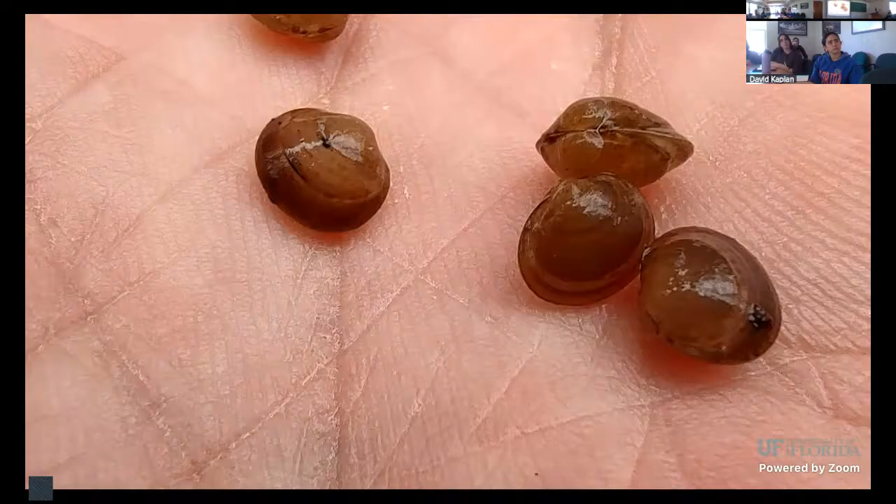The wetland basins at Fort Ancient contain clay that was purposely compacted. Some of the vernal ponds are lined with gravel. The gravel was carried by hand in baskets uphill from the Little Miami River. The vernal ponds are being used for breeding by fingernail clams, frogs, toads, salamanders, and dragonflies.

The wetlands are based on compacted clay, so water is slow to soak into the ground. Tree roots growing under the vernal ponds cannot remove water from the ponds because of the compacted clay layer. The overflow or spillway for the wetlands at Fort Ancient Earthworks are wide. This allows water to leave the wetlands in a sheet-like pattern and not cause erosion.

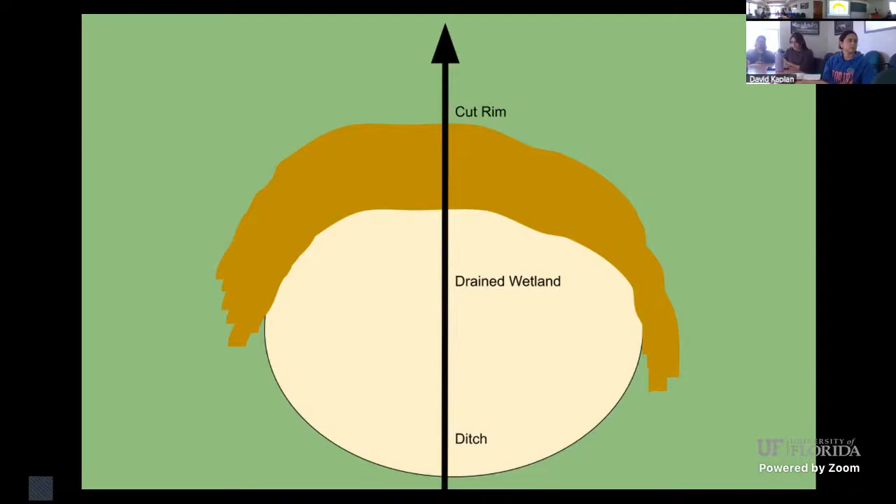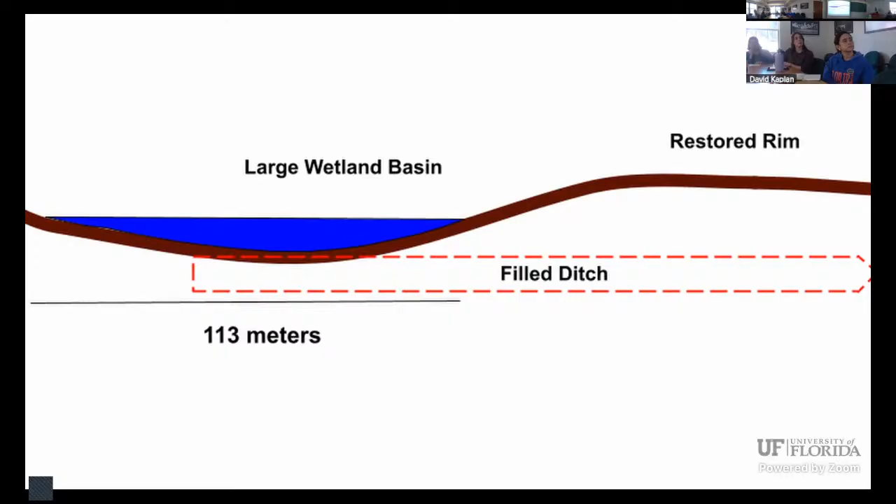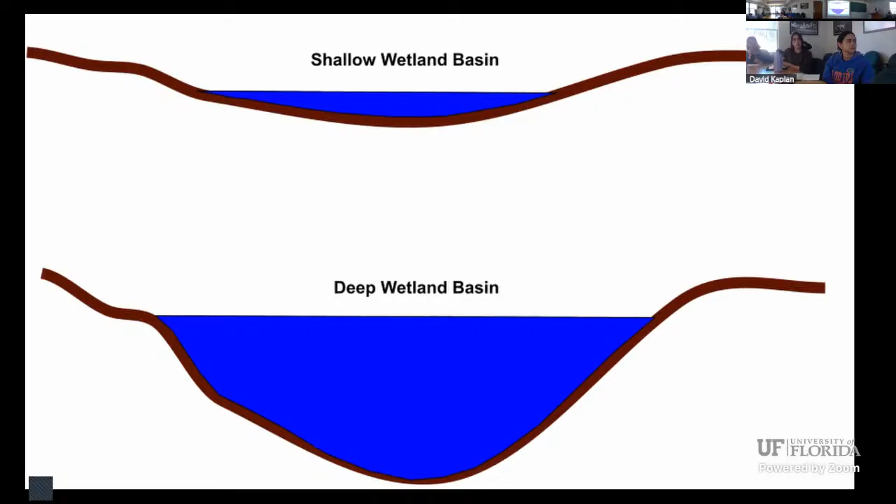The wetland basins you build can be large or small. You can build a wetland basin to be shallow like this one, or deep like this one. The wetland basin can be shaped to be smooth or varied with pits and mounds so shrubs and trees may grow in the wetland.

Start the design process by identifying an area where there is no stream, no ditch, or drainage that would enter the wetland. This is a good place to build a wetland that will last forever because the area does not flood and there are no streams or ditches entering or leaving the area. Walk around the area to identify and map ditches.

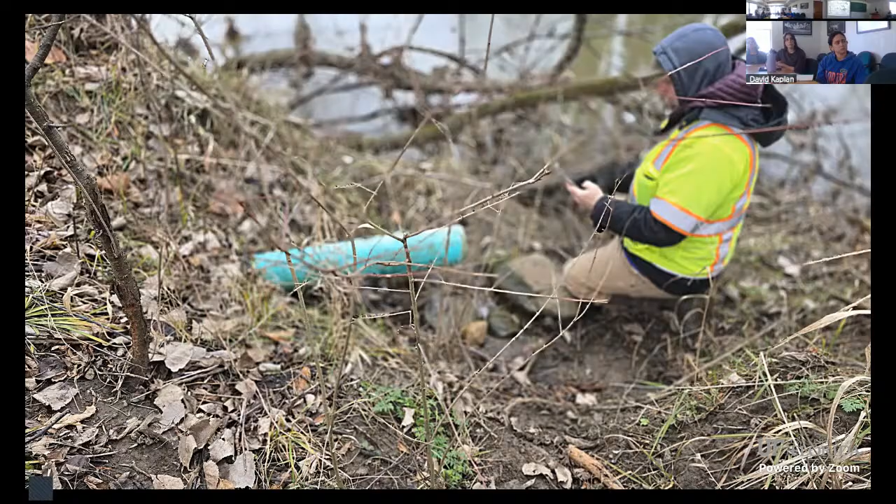Examine ditch banks carefully to see if you can find the outlets of buried drainage structures. Look for pieces of pipe that indicate drainage structures were buried on the site. Look carefully for vertical holes that often indicate the presence of buried drainage structures.

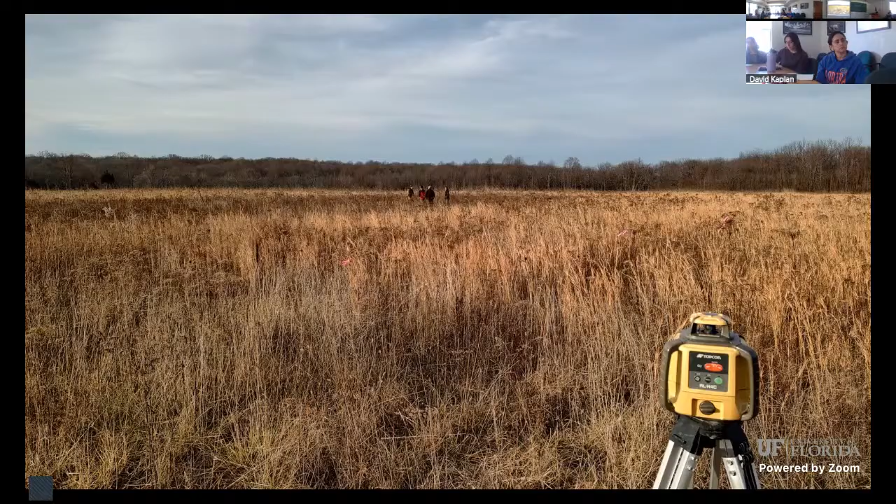Set up a long-range laser level with a red beam on a tripod next to the area where you want to build the wetland. Use a laser receiver and a dual-sided grade rod to measure the change in elevation from the upper to the lower edge of the wetland you would like to build. Record the elevations you take with a dual-sided grade rod on a GPS and on a wetland design form.

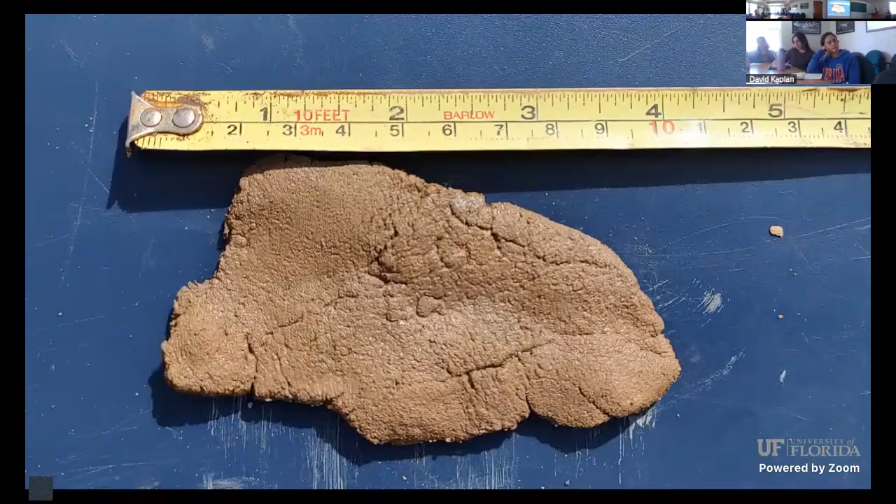Use an open-face clay auger to dig a deep test hole near the center of the wetland you would like to build. Wait and see if groundwater enters the hole. You may be able to use the groundwater technique to build the wetland if water seeps into the hole and rises near the surface. Use the ribbon test to measure clay content in the soil. You may be able to build the wetland using the surface water technique if you can form a long and thin ribbon that does not break that is at least 2 inches or 5 centimeters long.

This open-face clay auger contains soil that is very low in clay. One would need to use an aquatic-safe liner to build a wetland on this site. This is because the short sections of ribbon show that the soil is low in clay. Also, groundwater did not enter the test hole. An aquatic-safe liner is needed to build a wetland on this site because groundwater did not enter the test hole and the soil texture is low in clay.

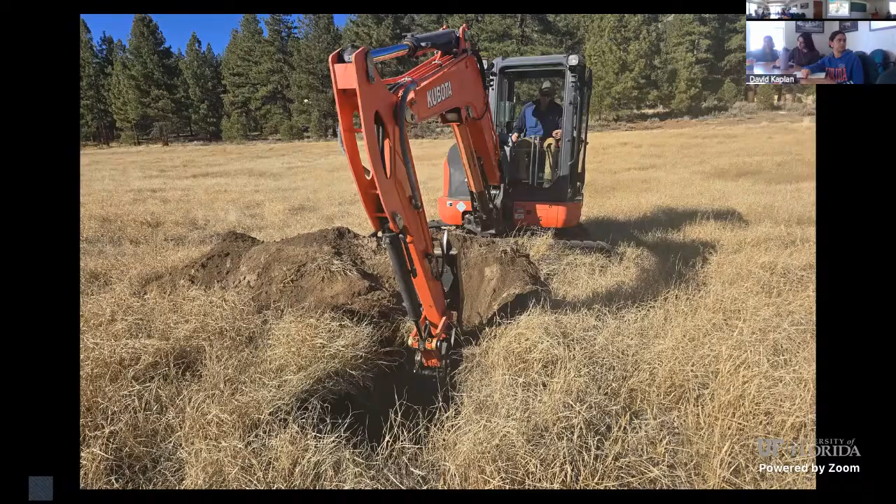I strongly recommend using an excavator to dig deep test holes when designing a wetland project. One can better see and measure the depth and the thickness of soil layers that are exposed in the deep test holes dug with an excavator. This deep test hole shows that groundwater is near the surface and a wetland may be built using the groundwater technique. The reason groundwater is not at the surface is that ditches and buried drainage structures were installed to drain the historic wetland so it could be farmed.

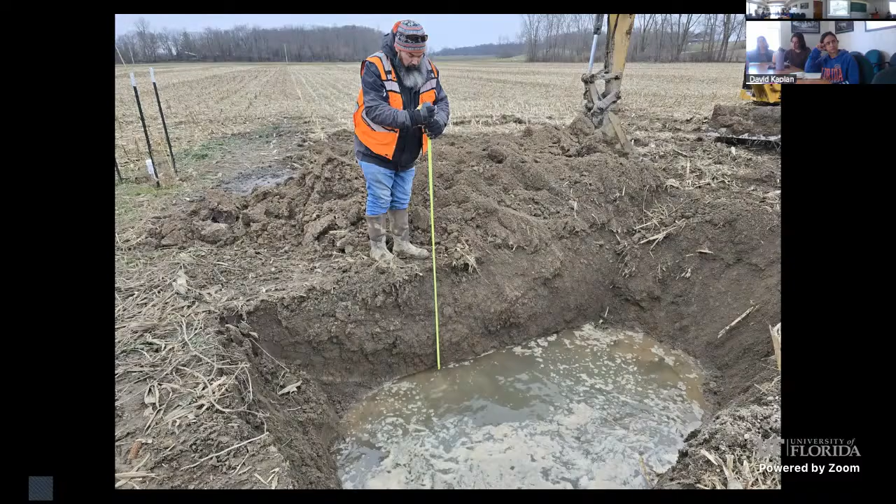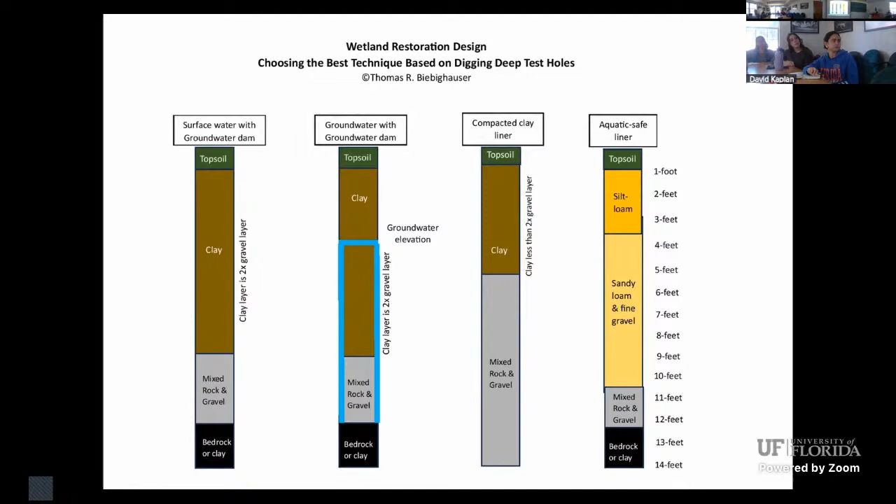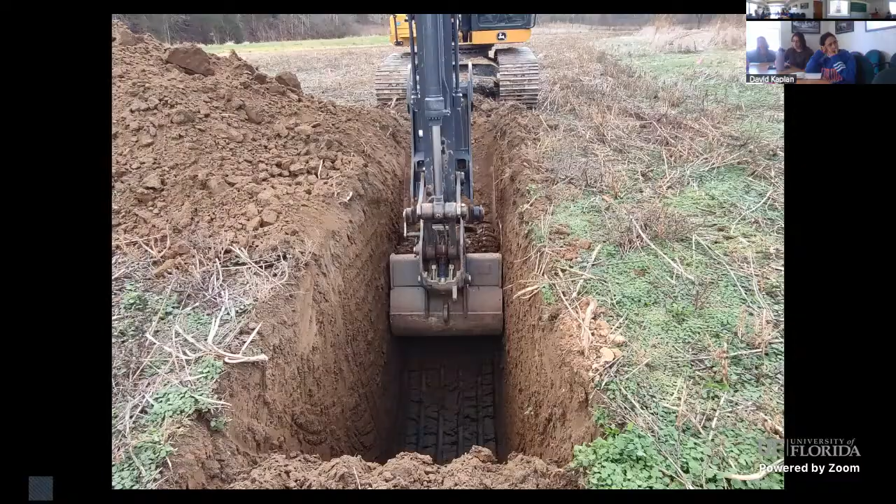This table can help you choose the best technique for building a wetland on a site. Each technique is based on soil texture by layer and the elevation of groundwater that's found in the test holes you dig. This key can help you choose the best technique to use for building a wetland on a site. Here's a wetland that was built using the surface water technique with a groundwater dam. The surface water technique with a groundwater dam is used where there is a thick layer of clay over a thinner layer of gravel that overlays impermeable bedrock or a very thick layer of clay.

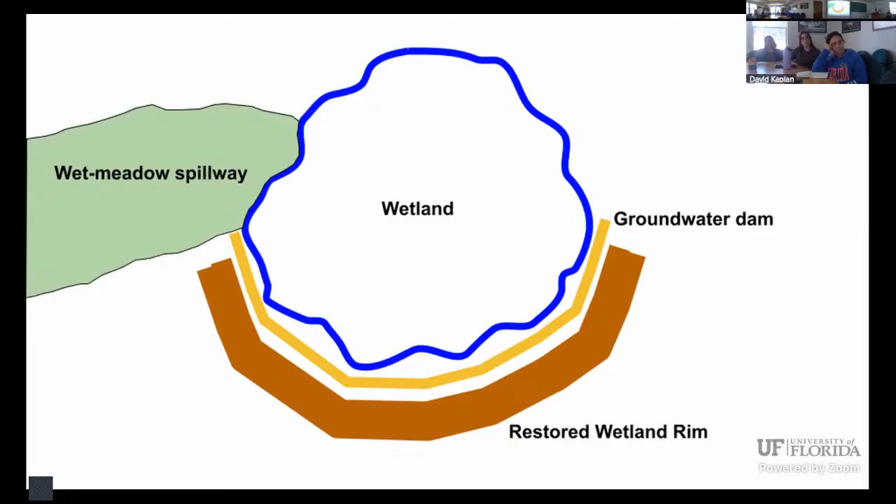When building a wetland using the surface water technique with the groundwater dam, it is of critical importance that buried drainage structures are removed and subsurface permeable layers of soil are interrupted by digging a core trench around the lower 2/3 perimeter of the wetland you're building, and then filling this core trench with clay in thin layers that are compacted to form a groundwater dam. I developed the surface water technique with a groundwater dam because it is the most effective and the lowest cost way to build a wetland of any size.

Groundwater dams are effective because they block buried drainage structures that are made from wood, rock, clay tile, or plastic. They reduce water losses from roots, root channels, and topsoil. They block water leaving the wetland underground in permeable layers of organics, gravel, sand, silt loam, and loose clay. And they allow burrowing crayfish to live in your wetland without draining the wetland.

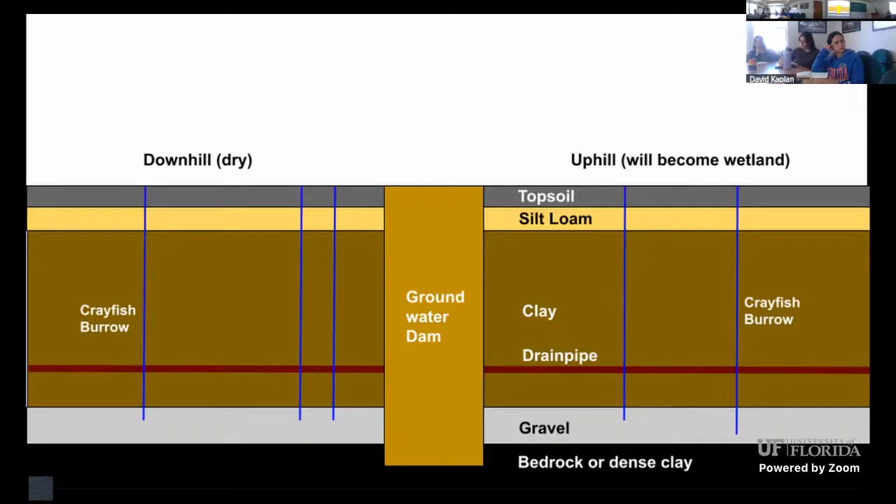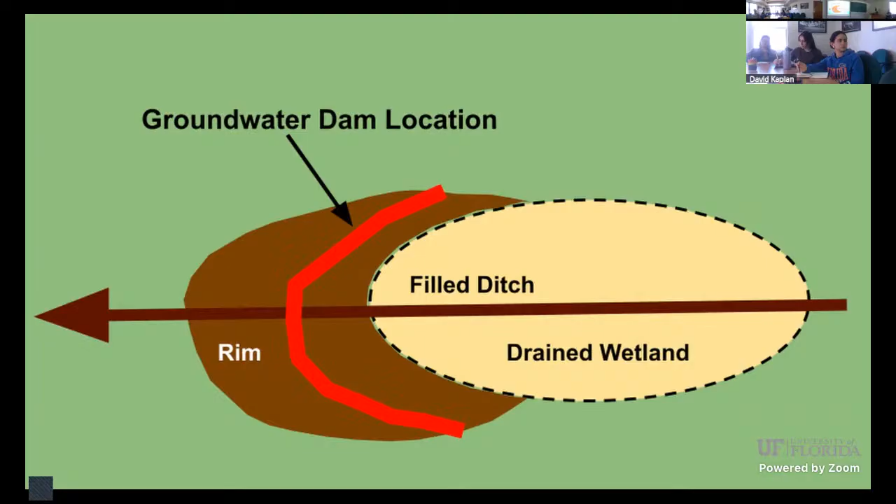A groundwater dam is built along the lower 2/3 perimeter of the wetland you've designed. The top of the groundwater dam should be equal to or higher than the elevation of water or saturated soil in the wetland that you're building. To restore a wetland, it is necessary to fill the ditches and to restore the natural rim along the lower side of the wetland that was drained.

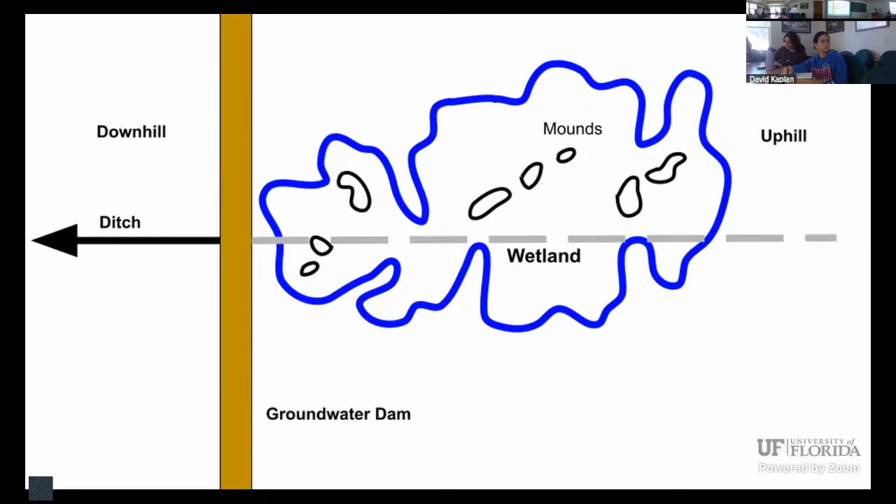The groundwater dam will block the flow of water in buried drainage structures and in the ditches that have been filled. A groundwater dam should be used wherever you are blocking a ditch to build a wetland. The groundwater dam will block the water you see flowing in the ditch and the water you can't see that's flowing underground in the ditch.

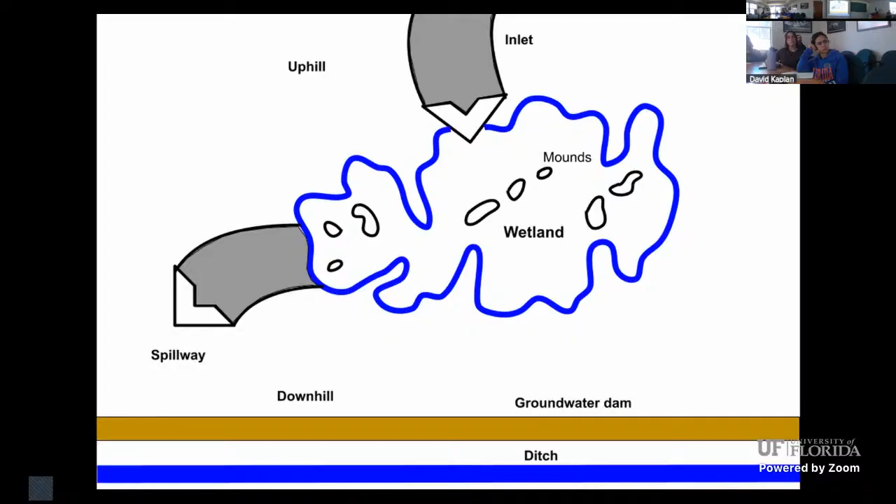Here's where a groundwater dam should be built when you are building a wetland that is near a ditch that cannot be blocked by the project. The groundwater dam will prevent the ditch and the water flowing in underground drainage structures from drying the wetland that you're building.

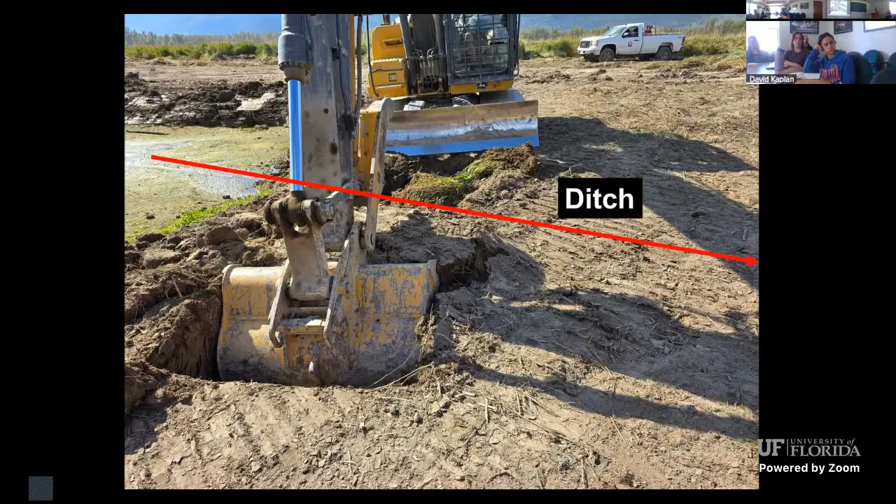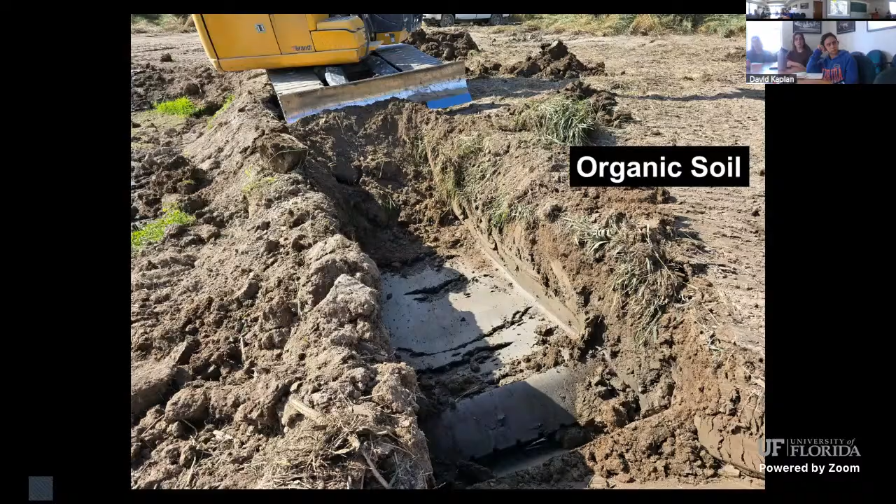Here's how we use an excavator to build a groundwater dam to block a ditch as part of a wetland restoration project. The excavator begins by digging a trench across and perpendicular to the ditch. The ditch is shown by the red arrow. The soil that is organic or low in clay is placed along the downhill or downstream side of the trench being dug. This soil will not be placed back in the trench. The soil that is high in clay is placed along the uphill side of the trench. This clay will be placed back in the trench to form the groundwater dam.

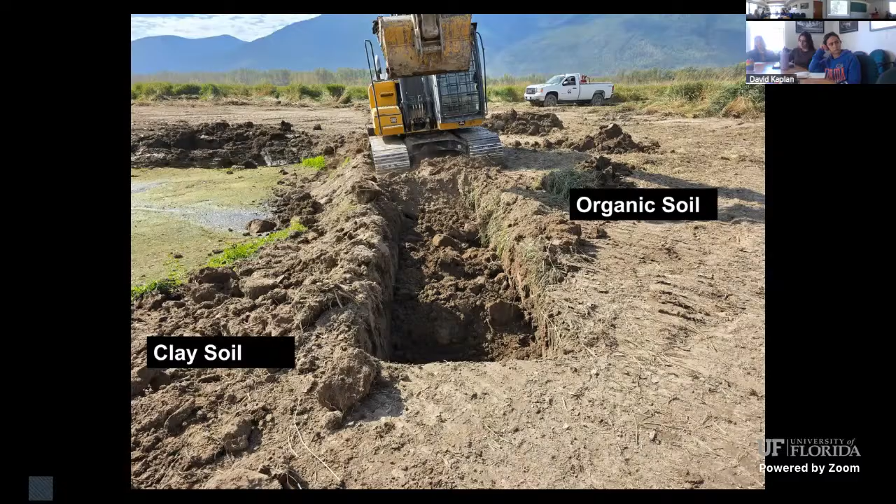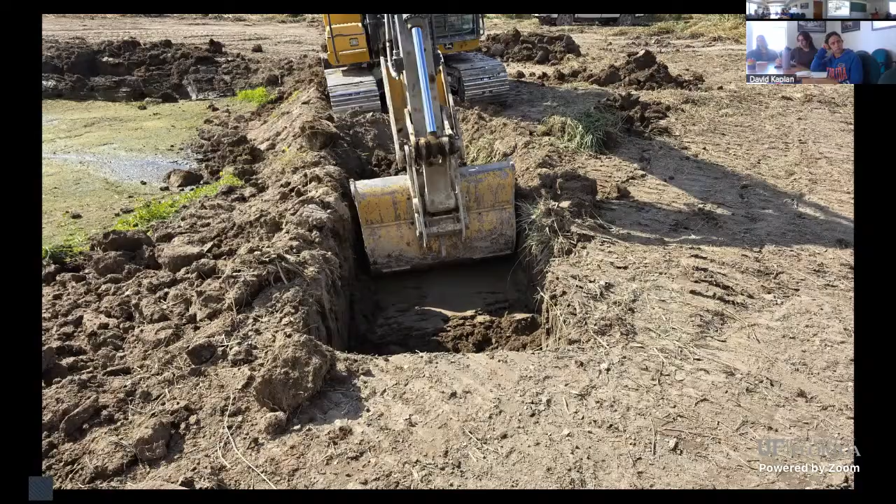The excavator operator digs down into a very thick layer of clay that is gray in color. The clay soil that was saved is mixed and placed back into the section of trench that was dug. The operator compacts the clay soil in layers using the bucket on the excavator. To gain maximum compaction, the operator tips the excavator forward so the entire weight of the machine is on the bucket. The core trench is dug and filled in sections to build the groundwater dam.

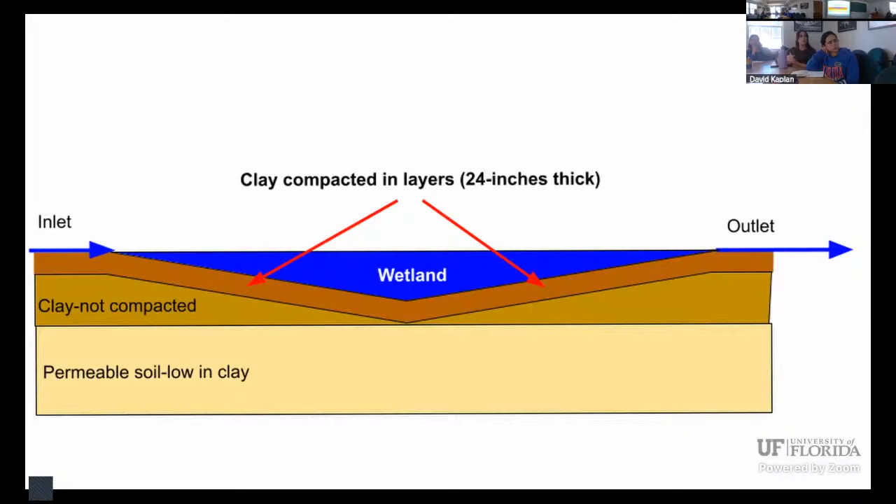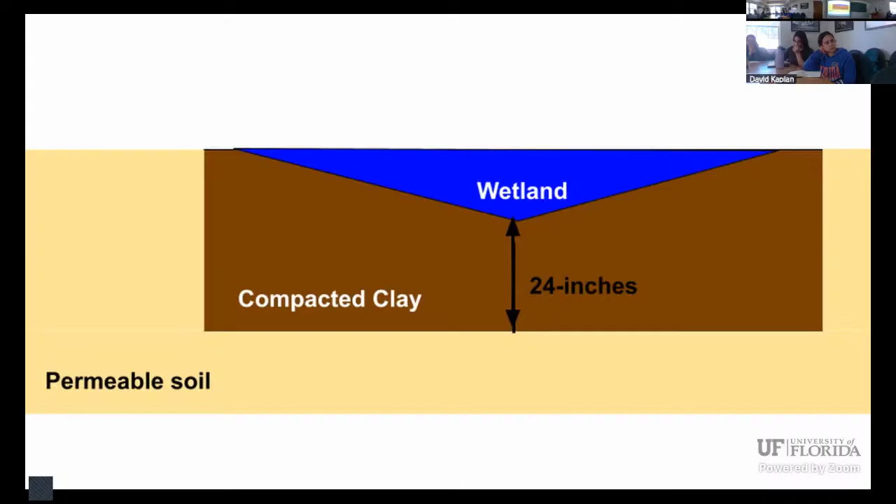We built this wetland at Sweet Briar College in Virginia using the compacted clay liner technique. The compacted clay liner technique is used where it's not possible to build a groundwater dam and there's a layer of clay near the surface that is at least 4 feet thick. The compacted clay liner technique is difficult and costly to use. This is because it is necessary to spread and compact in layers clay so that it is at least 24 inches thick in the basin to form a wetland.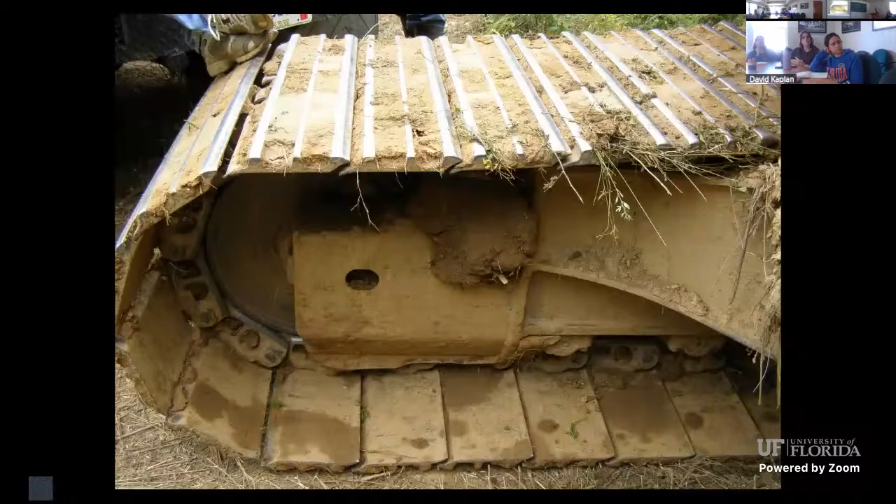We set up the laser level on a mound so the beam would be above the tall vegetation in the field. We first used the laser to measure how much sand to remove and then to monitor the thickness of compacted clay we used to line each basin. Here the excavator is being used to spread a 6-inch thick layer of clay over the sand in the basin for the wetland. The excavator then travels over the layer of clay to compact it.

The next step involves traveling over the layer of clay with a tractor that has rubber tires. To obtain greater compaction, the tractor operator carries a full bucket of soil as it drives over the clay. The tractor operator travels around the wetland basin in different directions to compact the clay.

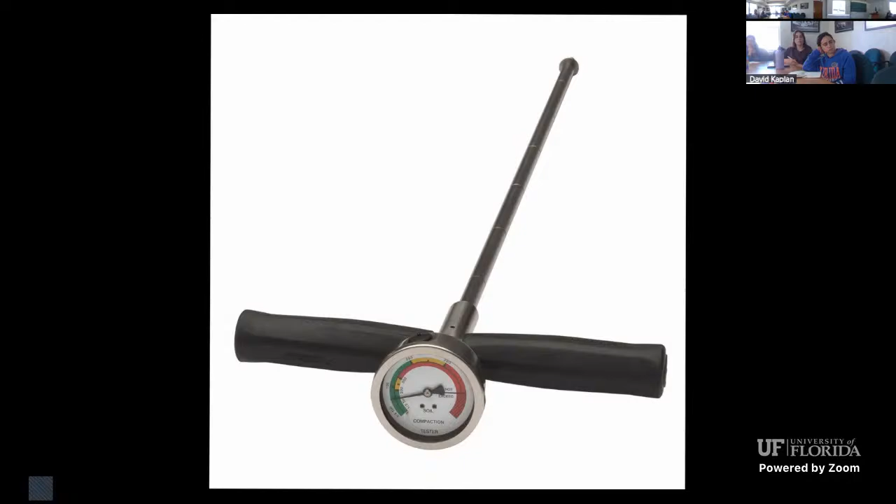The excavator spreads the second layer of clay over the first layer of compacted clay. The tractor travels over each layer of clay multiple times until it's compacted. We frequently measure the degree of compaction with a penetrometer and the thickness of compacted clay using a laser level. We keep adding and compacting layers of clay until there is at least 24 inches of compacted clay over the

entire wetland basin. The topsoil that was saved is now spread over and around the compacted clay in the wetland basin. The excavator is used to plant clumps of vegetation that were saved when the area was cleared. Wheat and native plants are seeded in and around the finished wetlands.

Here's how one of the wetlands we built at St. Anne's Convent using the compacted clay liner technique appeared 3 years after construction. Here's one of the wetlands we restored using the compacted clay liner technique near the community of Sparwood in British Columbia. This small vernal pond was inadvertently created using the compacted clay liner technique when iron ore was mined in Bath County, Kentucky almost 100 years ago.

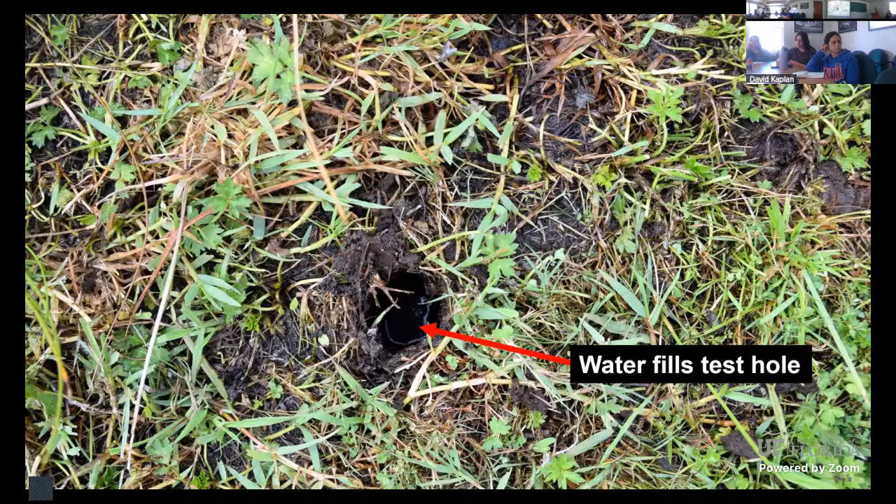We built this wetland using the groundwater technique near Meadow Creek in British Columbia, Canada. If groundwater fills the test hole you dig, then you may be able to build a wetland on the site using the groundwater technique. Here's how a vernal pond wetland we built looks in the spring on a site where groundwater is near the surface in the spring. And here's how the same vernal pond looks when the groundwater drops to more than 6 feet below the surface

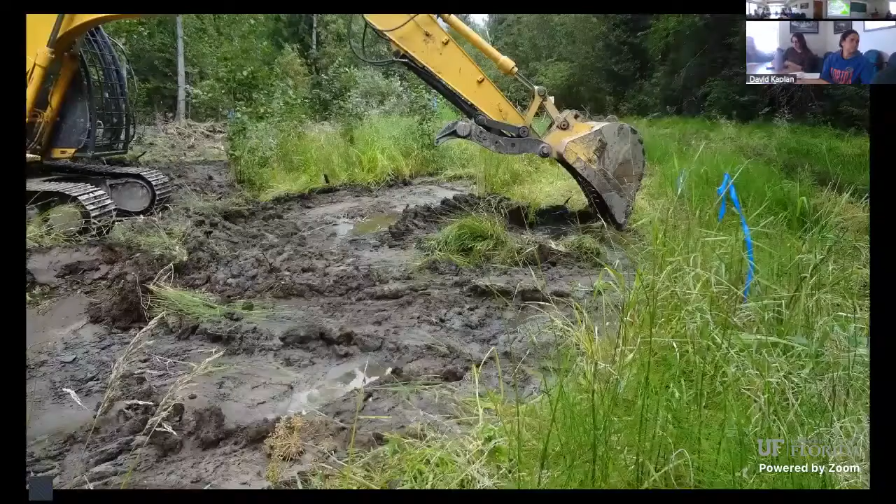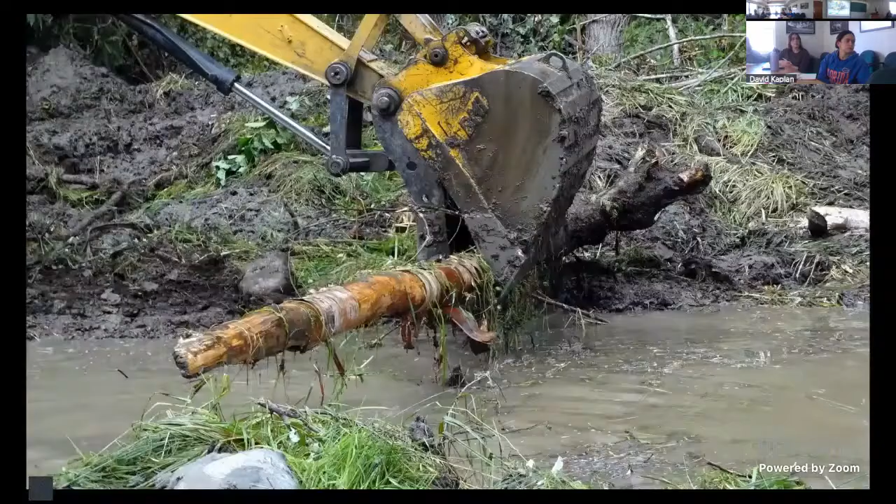in the fall. Here an excavator is being used to build a wetland using the groundwater technique. Groundwater is rapidly filling the depressions being made by the machine. The excavator operator keeps the machine from sinking by placing logs under the tracks. Logs are placed in the wetland to provide perches for birds and turtles with basking sites.

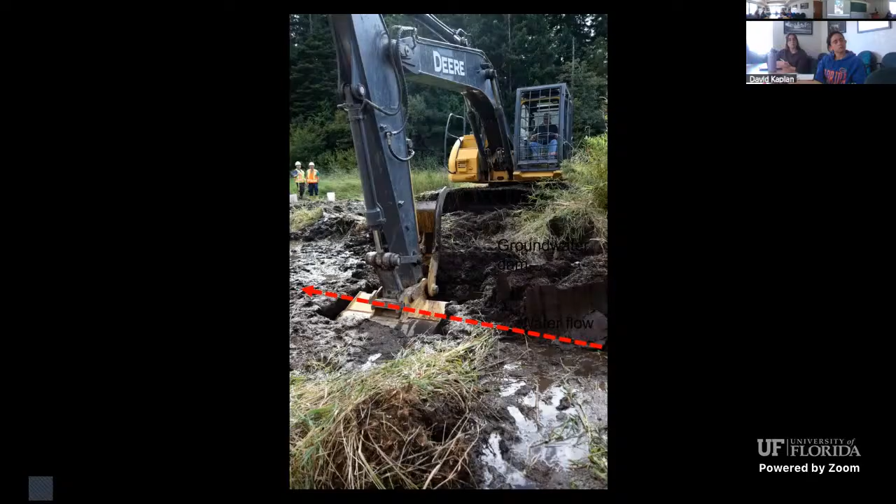The disadvantage in using the groundwater technique is that there's a lot of soil that needs to be spread. Think of how much space it would take if you flipped a pie out of a pie pan. The same is true when digging a wetland using the groundwater technique. Here's one of the wetlands we built using the groundwater technique the day it was finished. The site looks unattractive with all the exposed mud.

This photo shows another wetland we built using the groundwater technique. The new wetland doesn't look good because the water is muddy. The photo was taken the same day the wetland was built. The new wetland looks great 1 year after construction. The logs are being used by the western painted turtle for basking. The soil we removed and spread has become wet meadow wetland.

While building the wetlands, I could hear water running near the wooden bridge that people were standing on. The sound was made by water flowing over the head cut under the bridge. We had to control the head cut before it could advance and destroy the wetlands we were building. The excavator began by digging a deep trench across the floodplain of the ditch immediately upstream and adjacent to the head cut. We dug the trench deeper than the bottom of the ditch downstream of the head cut.

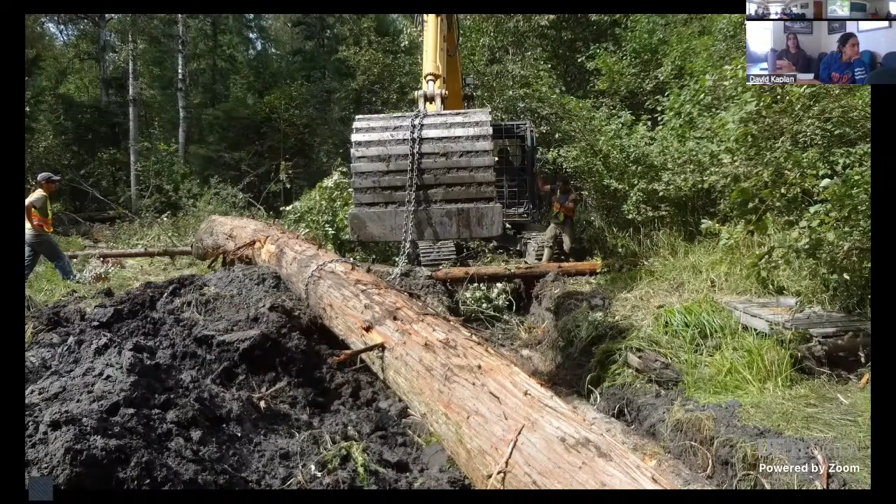We used a tape to measure the length of the trench that spanned the floodplain of the ditch so we could find and cut trees that would fill the trench. We used the excavator to place the largest diameter trees we could find in the trench. We worked to fit the trees tightly together in the trench. The excavator operator used the bucket on the machine to push the logs into the ground and to pack them

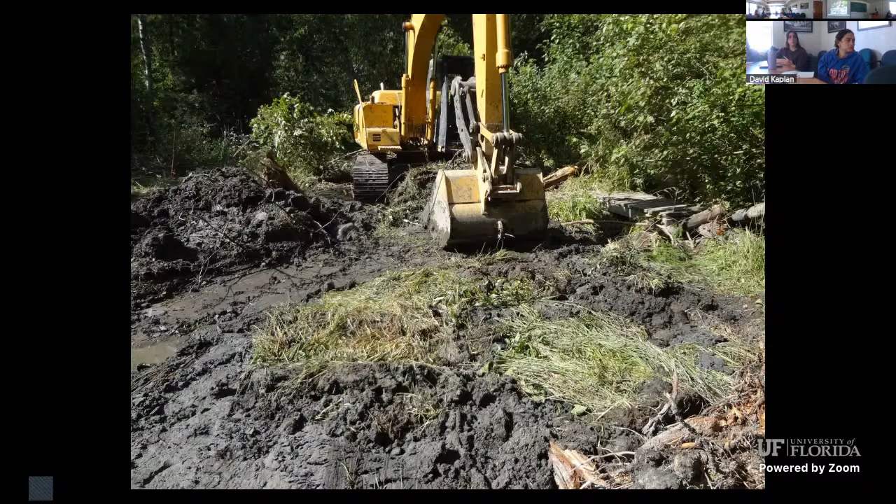tightly together. Soil was pushed into the gaps between the logs and to cover the logs, forming a wide floodplain with low banks and a narrow channel in the middle for water to flow over the logs into the deeper channel downstream of where the head cut was located. The floodplain was shaped so that water would flow over the logs in a sheet-like pattern and not cause erosion. Clumps of sedges were embedded into the soil over the logs to control erosion.

I've been using aquatic safe liners to build wetlands like this one, and this is where clay soils are not present and groundwater is not near the surface. We've been building wetlands for rare species of amphibians and reptiles across North America using aquatic safe liners.

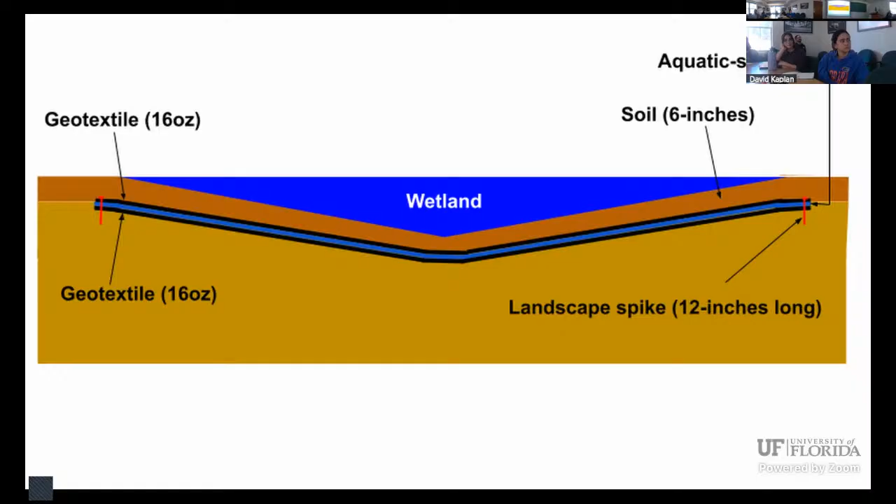This drawing shows a profile view of how a wetland may be built using a one-piece factory-seamed aquatic safe liner that is protected on both sides by thick layers of geotextile and covered with at least 6 inches of soil. The most efficient way to build a wetland using an aquatic safe liner is to use an excavator.

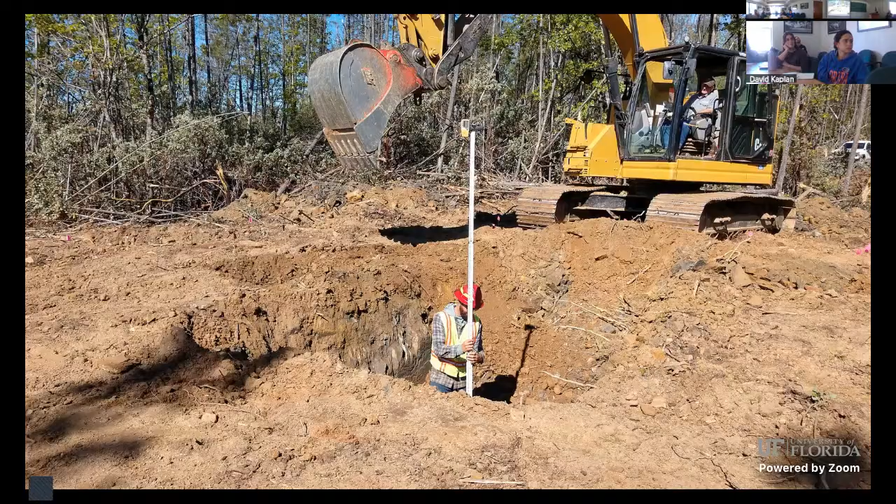Here the excavator removes trees and shrubs from a location where a wetland is being built. You can see a piece of rebar that we used as a stake to mark the center of the planned wetland. The excavator digs a deep hole in the center of the area where the wetland is being built. The elevation in the bottom of the hole is equal to the final depth of the planned wetland, plus the thickness of soil to be placed over the liner and geotextile.

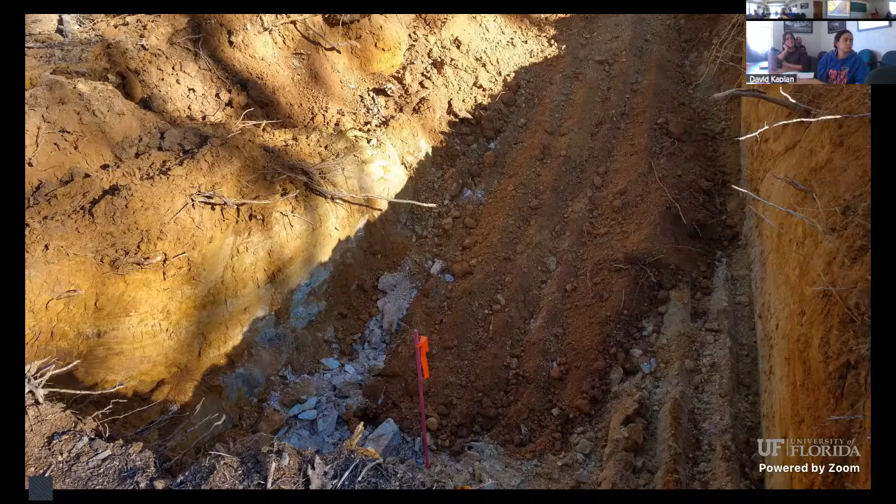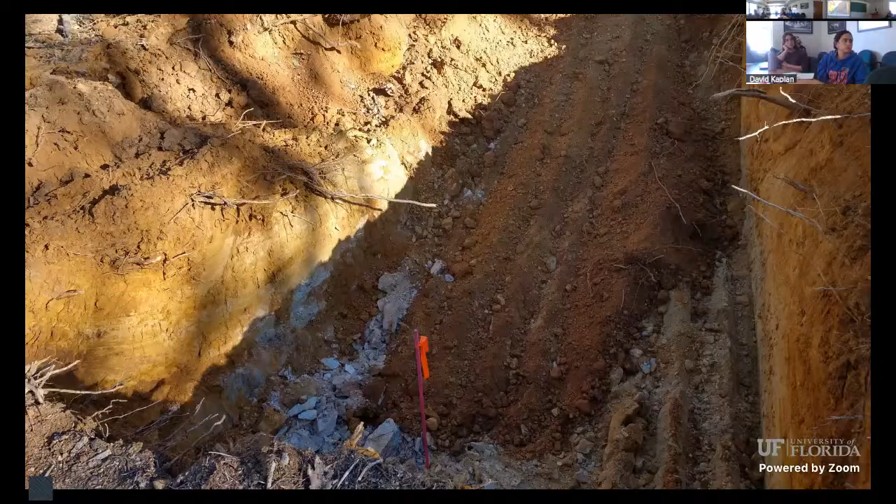The stake serves as a guide when digging the basin for the wetland. The wetland basin is dug deepest in the center with slopes no steeper than 20%. The gradual inside slope prevents soil that is placed over the liner from slipping downhill if deer or elk wade into the water. Digging the wetland basin is much like removing pieces of pie from a pie pan.

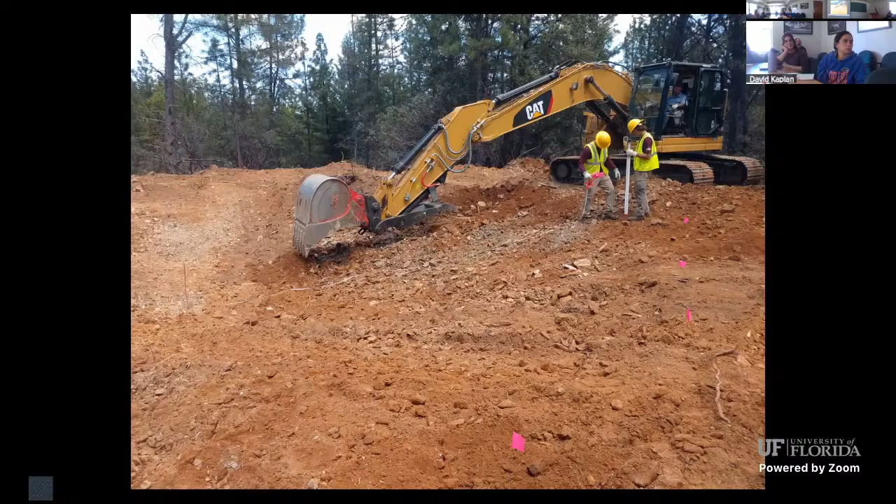It is of critical importance to be on site working with the heavy equipment operator to build a wetland using a liner. Here the end of the tape has been placed over the rebar stake. The tape is stretched out to a distance equal to the radius of the liner being used.

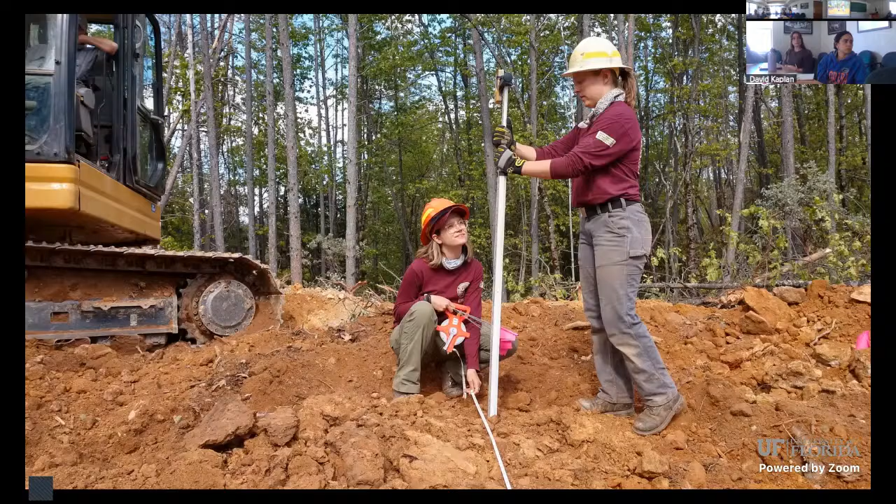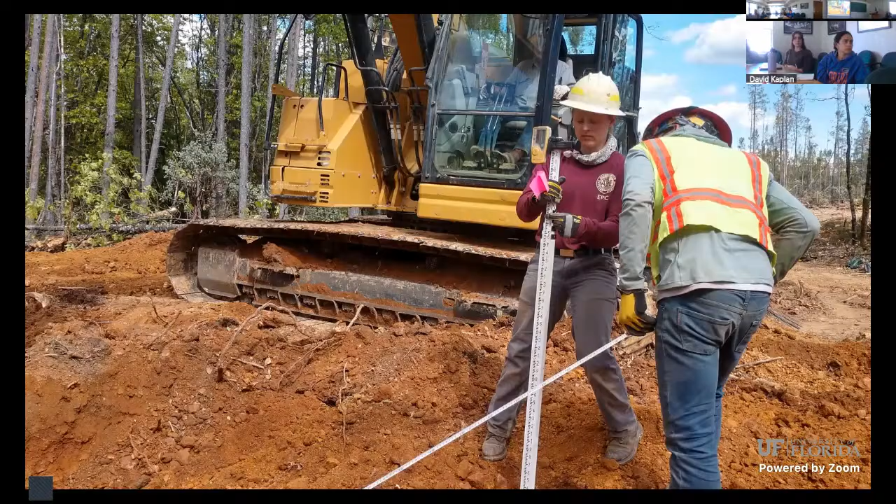A laser level is used to check the elevation of the ground at a distance equal to the radius of the liner being used. All the elevations around the perimeter of the basin must be the same. Any low spots would reduce the depth of water in the finished wetland. Elevations are checked before the excavator moves to dig another section of the basin.

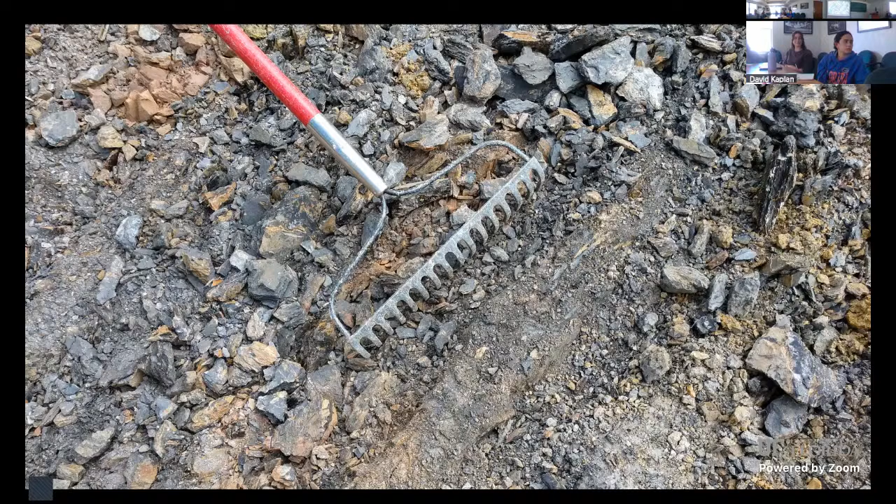Once the basin is dug, all rocks are removed by hand before the liner and geotextile are placed. Removing the rocks from the basin takes time, but helps to ensure that the wetland will hold water as planned. A pickup truck is used to transport the liners and geotextile from where they are stored to the worksite.

A thick layer of fabric called geotextile is placed in the basin to protect the underside of the liner being installed. A fish-grade, aquatic-safe liner is placed over the geotextile. Another layer of geotextile is placed over the liner to protect the surface of the liner. 12-inch long landscape spikes are used to anchor the top edge of the liner and geotextile. These are placed 1.5 feet apart.

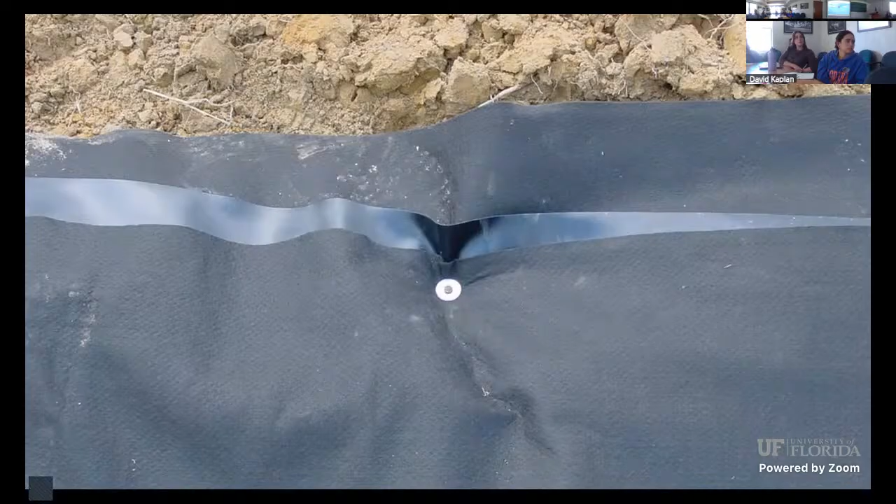The 12-inch long spikes are used to anchor all 3 layers, preventing the materials from slipping when being covered with soil. The corners of the material are cut and removed before covering with soil. Wire flags are placed along the perimeter of the geotextile and the liner to show the excavator operator where the liner is located while covering with soil.

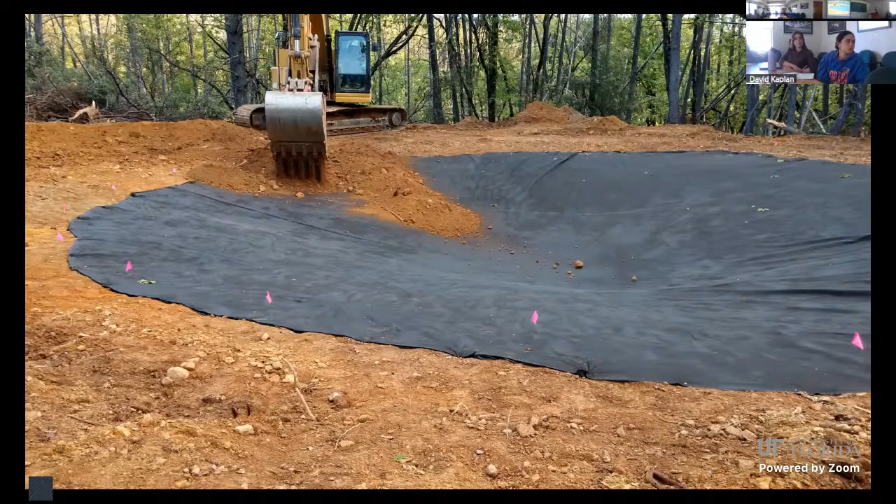Here is the aquatic safe liner that's sandwiched between layers of geotextile and it's ready to be covered with soil. The basin is shaped like a large satellite dish. The excavator is used to place from 6 to 8 inches of soil over the liner and geotextile.

Absolutely no heavy equipment is allowed to travel over the liner. The liner will tear and the basin will fail to hold water if any part of heavy equipment drives over the liner and geotextile. At least 6 inches of soil is placed over the liner, including the top edge of the liner. The pink flags show the excavator operator where the edge of the liner is located.

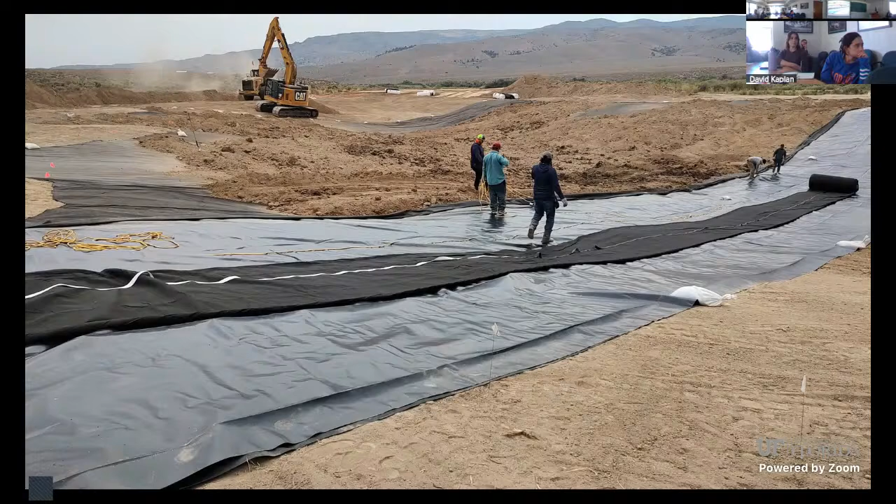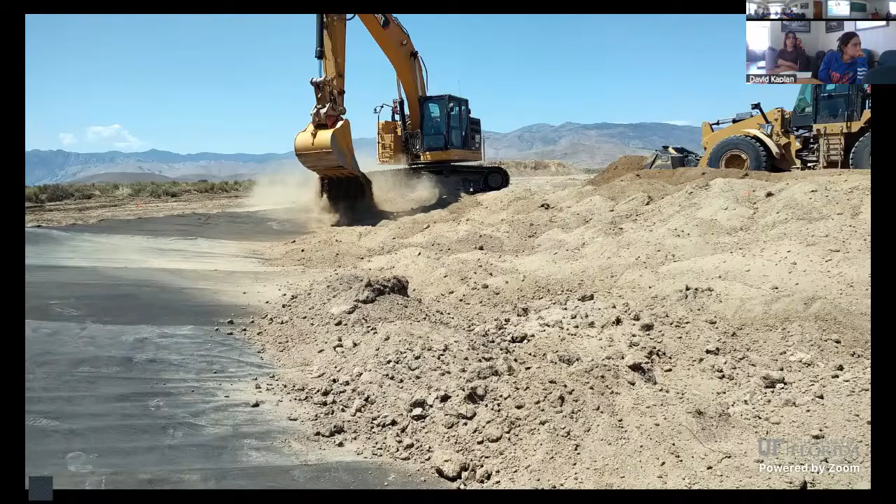The liner and geotextile are placed in the basin in strips that are 24 feet wide. A professional crew seams each strip of geotextile and liner material. A large excavator and wheel loader are used to cover each strip of liner and geotextile before the next sheet is seamed.

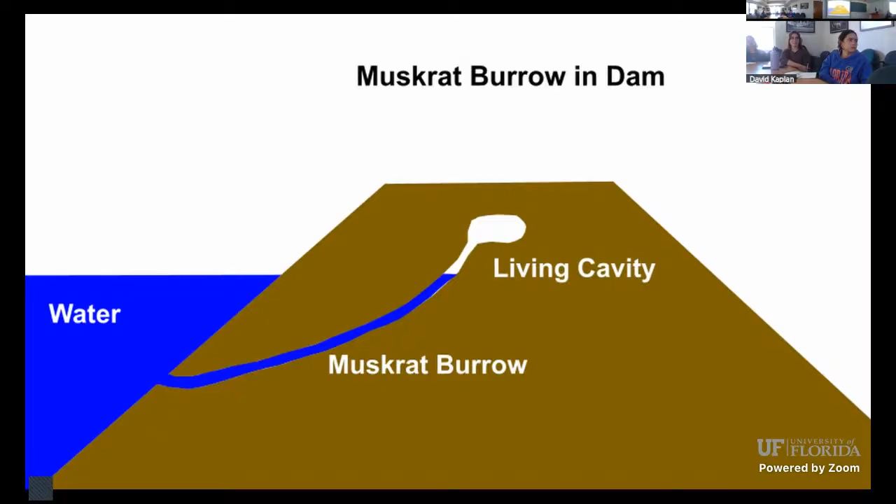Building a dam is a traditional practice, one that must end if you want a wetland to last for thousands of years. Muskrats are the main cause of dam failure in North America. Muskrats will burrow into the dam and cause the dam to fail. The entrance to a muskrat burrow is below the surface of the water. Muskrats build a living chamber in the portion of the dam that is above the water level in the wetland.

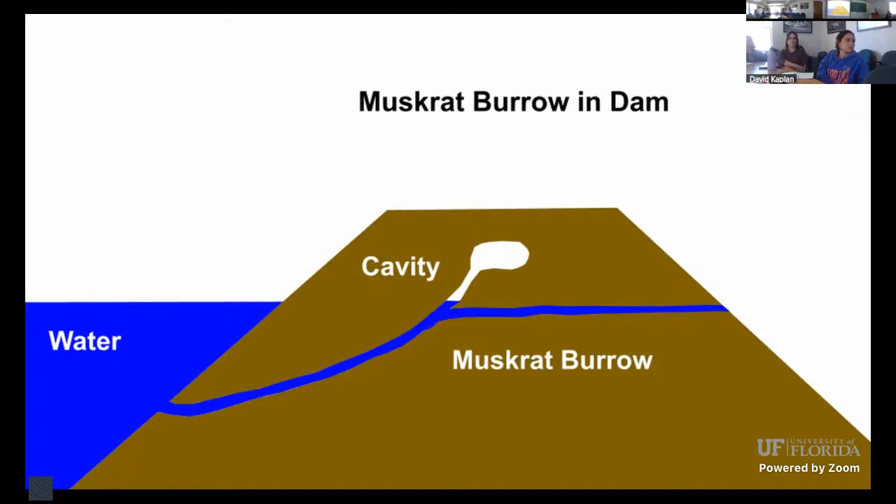Over time, muskrats will burrow through the dam. This can cause the dam to wash out in only a few hours. This muskrat burrow goes through the dam. We had to drain this wetland with a pump so the muskrat burrows in the constructed dam could be repaired.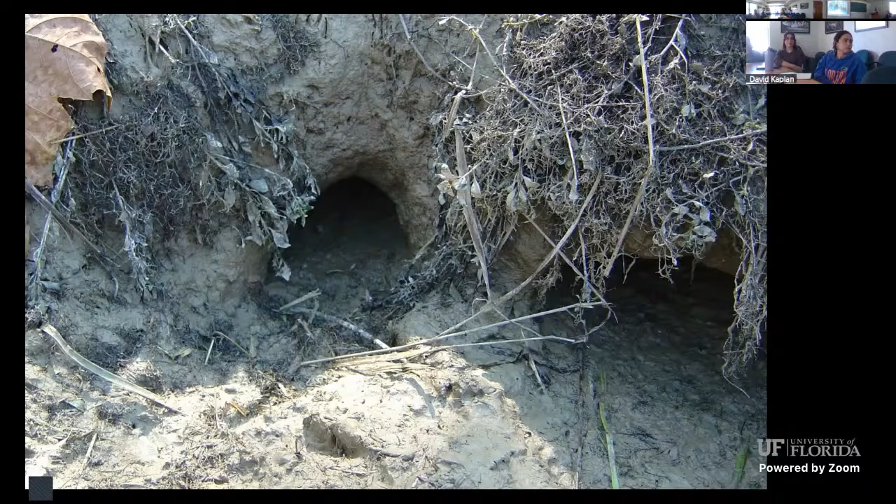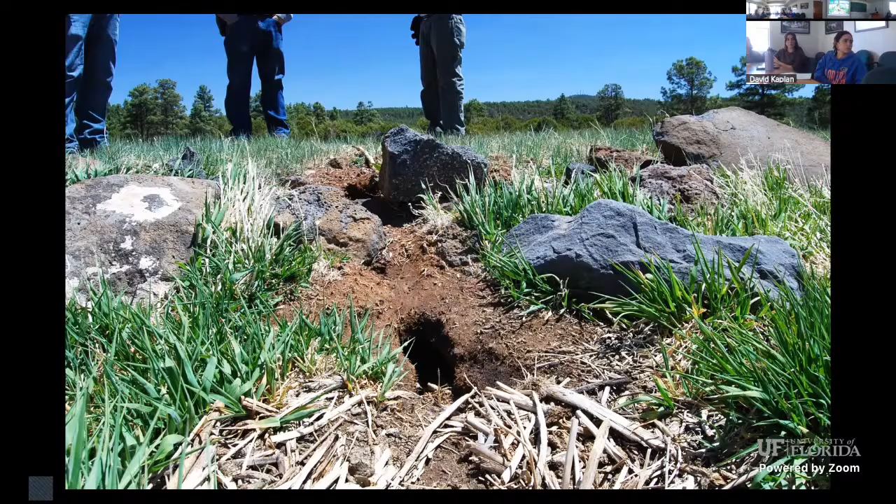One must use heavy equipment to dig out and expose the muskrat burrow and then fill the trench with soil that is high in clay and compacted. The wetland should be drained prior to repairing muskrat burrows. This photo shows a muskrat burrow that goes through the dam. Muskrats will quickly destroy a dam that has water on both sides. Here's where a coyote dug out the muskrats that were living in a dam. The large holes drain the wetland.

Here is where beaver have blocked the spillway constructed to prevent water from flowing over a dam. This can cause the dam to wash out. Beaver blocking spillways with their dams have caused many dams to erode and wash away. Beaver have dug a channel through this dam. The beaver channel is draining the wetland like a ditch. Here's another canal beaver dug through the top of the dam of a constructed wetland.

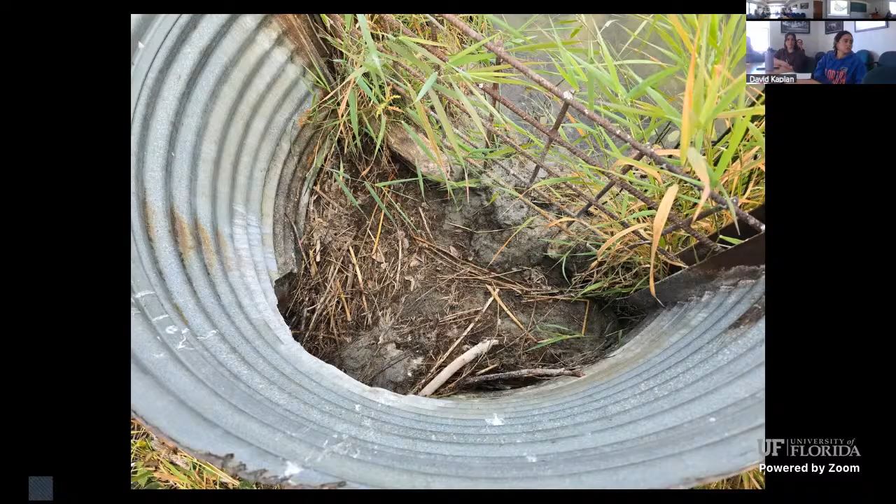You're looking inside of a flashboard riser water control structure that beaver have blocked. This can cause water to flow over and wash out the dam. The red arrow points to the top of a flashboard riser water control structure that has been covered by beaver. The water control structure is still leaking because water is flowing through the gaps that are between the boards in the water control structure that's below the surface, and this is draining a very large wetland. The island you see is where beaver have buried a water control structure in a constructed wetland. It would be very difficult and costly to repair the structure.

Livestock have damaged this dam and the spillway for the dam. This dam is also being damaged by livestock. This wetland was built by constructing a dam across an ephemeral stream. The wetland is failing because the spillway is too narrow and carries water down a steep slope. Two major head cuts developed in the spillway, and these are carving a deep canyon that will cause the dam to fail. The dam will soon wash away and the wetland will go dry.

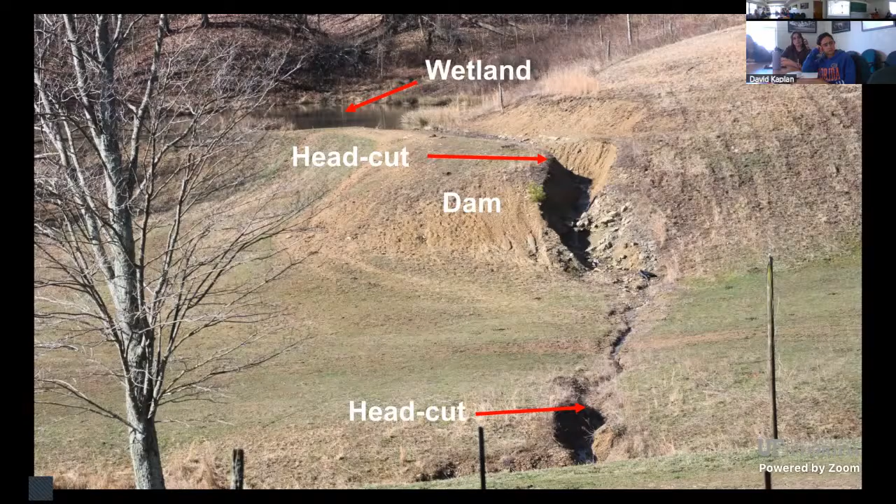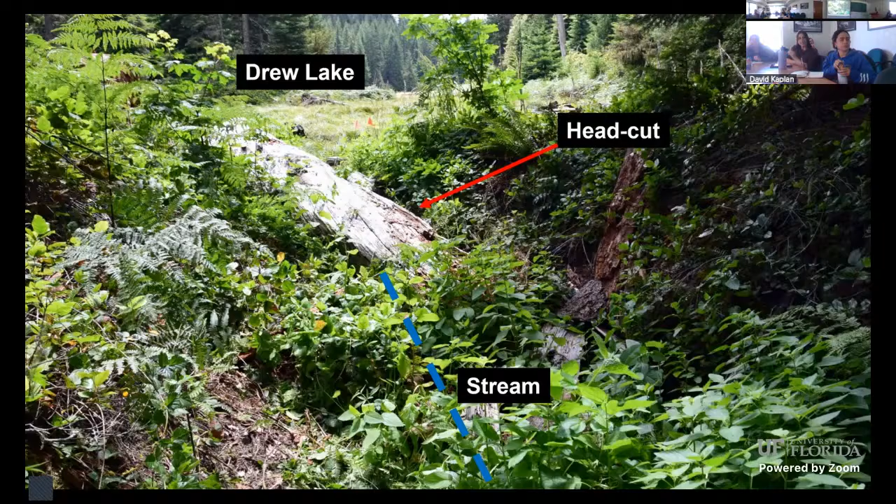You're looking at Drew Lake, a natural wetland on the Umpqua National Forest in Oregon. Drew Lake was about to be destroyed by head cuts that were located in a small stream flowing out of Drew Lake. The location of the head cut and the stream are shown by the red arrow and the blue line. The red arrow points to the head cut. The head cut is advancing into the wetland and would soon destroy the wetland. We controlled the head cut by installing a buried vertical grade control structure that was made from rock across the 100-year floodplain of the stream.

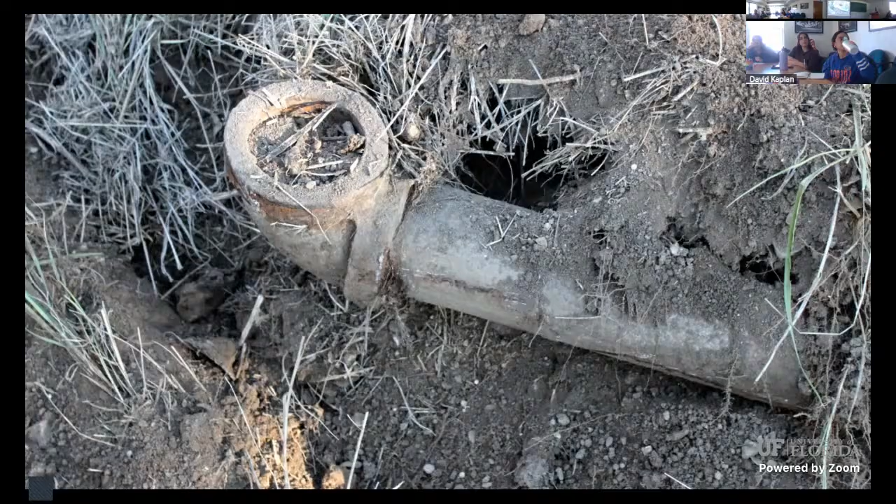Avoid using pipes in wetland construction. This leaking drain pipe was discovered when rebuilding a failed wetland. No one was aware of the presence of the pipe. This leaking pipe is draining an impoundment that was constructed 50 years ago. Avoid using water control structures in wetland construction. All water control structures will eventually fail, draining the wetlands that are built with them. Ice has damaged this water control structure.

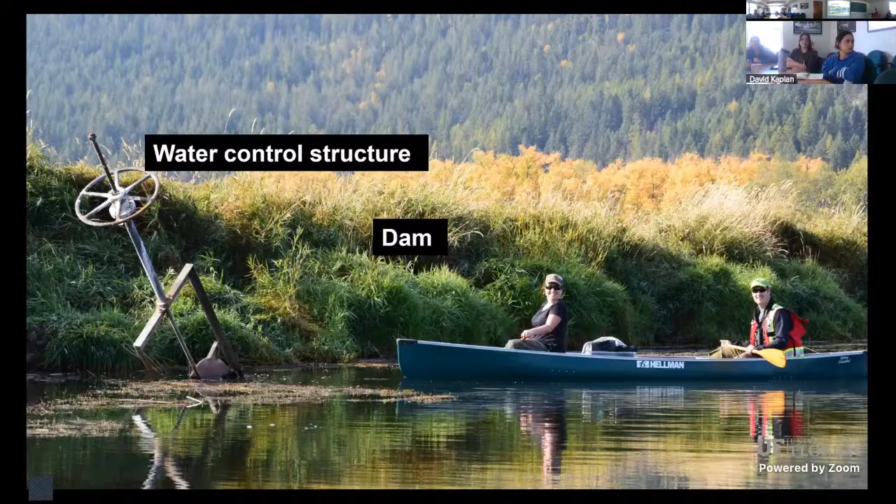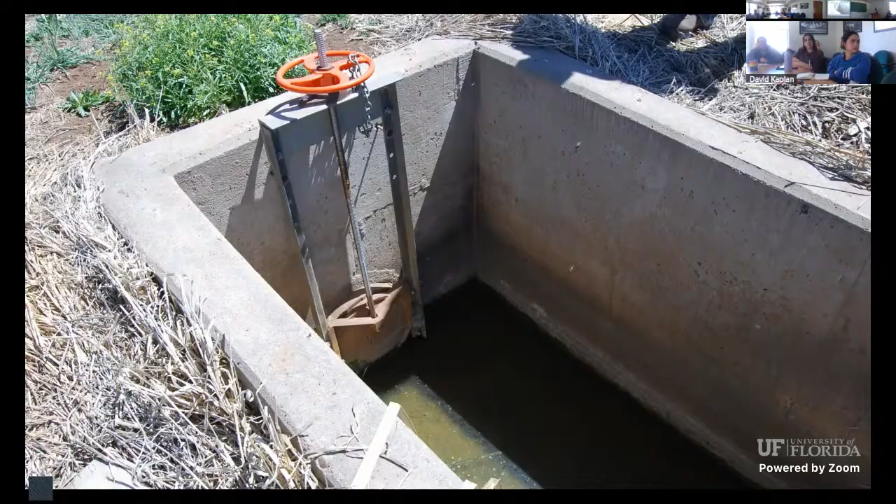The dam is also riddled with muskrat burrows and beaver canals. Avoid using valves and boxes when building wetlands. These will eventually fail. This rotted walkway leads to a water control structure valve that is rusted and needs to be replaced. The open valve can no longer be closed because the valve is rusted.

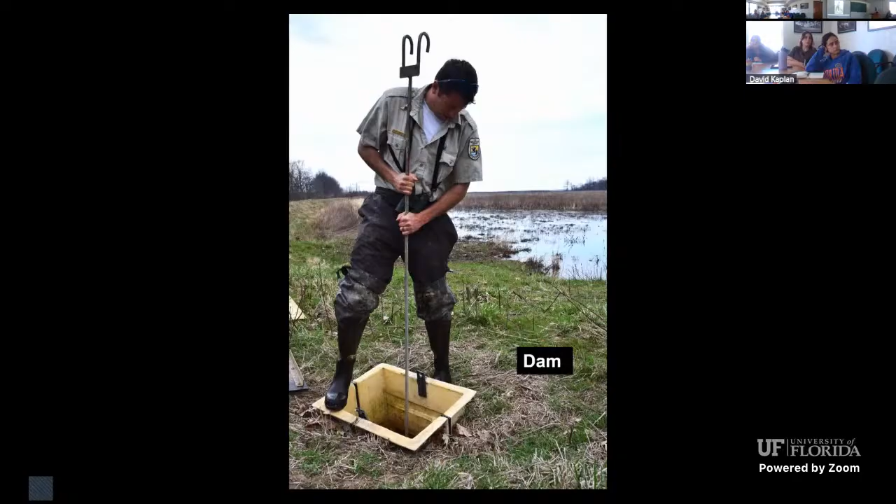The open water control structure is draining a huge wetland near Golden in British Columbia. I have installed over 1,000 plastic and fiberglass water control structures in wetlands. All will eventually leak and require maintenance. The plates in modern water control structures contain rubber gaskets. These gaskets will compress and tear, causing leaks that drain wetlands. The gaskets must be replaced every few years.

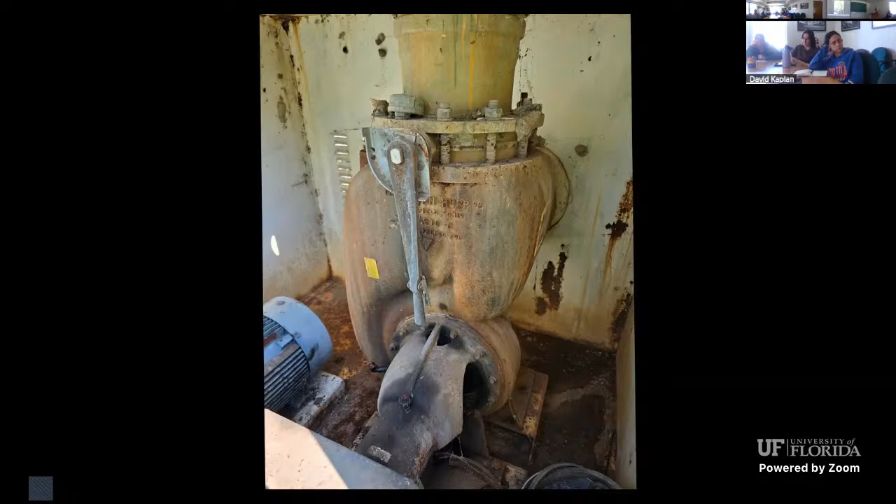Wetland managers will tell you about the serious and expensive problems that are associated with using pumps and wells to fill wetlands. A tremendous amount of money and time are wasted pumping water into constructed impoundments that leak worse than a bucket with holes in it. When working with engineers, require that all wetland projects be designed and built without using dams, berms, levees, dikes, diversions, ditches, wells, pumps, or water control structures.

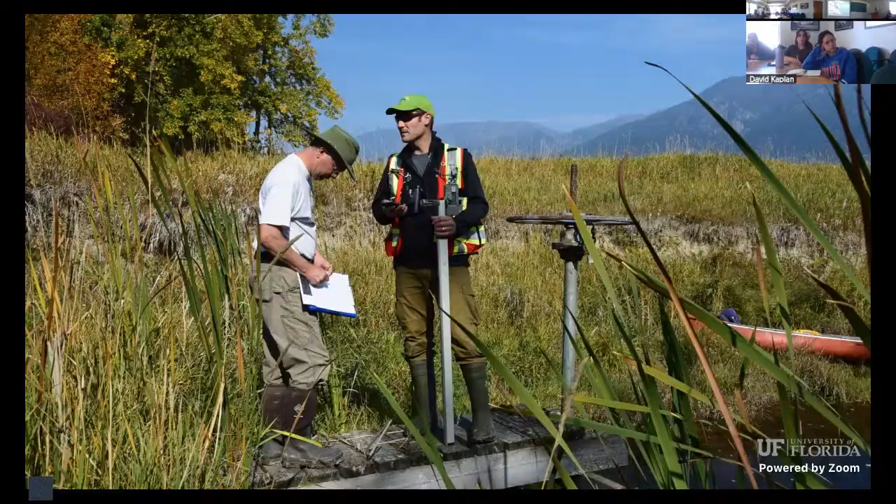I have found that people will rarely, if ever, maintain a dam or a spillway or water control structure after I build the wetland. This is why it's critical you don't build weaknesses into wetlands that will require maintenance. It is possible to build a wetland that looks and functions like a natural wetland. It is possible for us humans to build wetlands that will last for thousands of years. If you look, you can find examples of human-made wetlands that are many years old. Insist on using techniques to build wetlands that will not require maintenance.

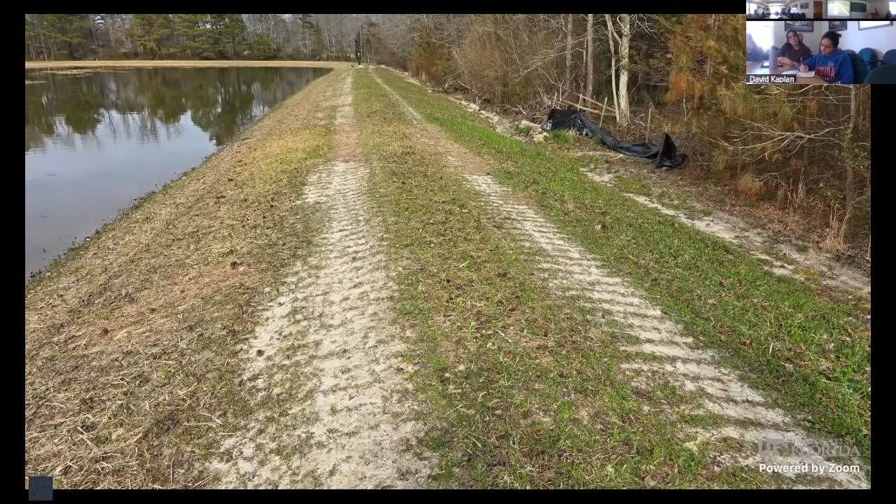I recommend taking these steps if you want to build a wetland that will last forever. Avoid building a dam, berm, or dike that's higher than the natural rim of the wetland that was drained. Avoid using a water control structure, drain pipe, or overflow pipe. Just say no to using pipes. Choose a site with a small watershed. Act to control all head cuts and erosion in the drainages entering and leaving the wetland you want to build. Use one of the techniques I've described that have proven successful for holding water. Build a wide spillway that carries water over a gradual slope that will not erode.

Please watch the videos I've produced to learn more about building wetlands that will last forever. I'm not sure why anyone would build a wetland with a dam and a water control structure when they know it's going to require maintenance in a few years. This would be like buying a home that doesn't have a foundation. There's bound to be problems before you know it.